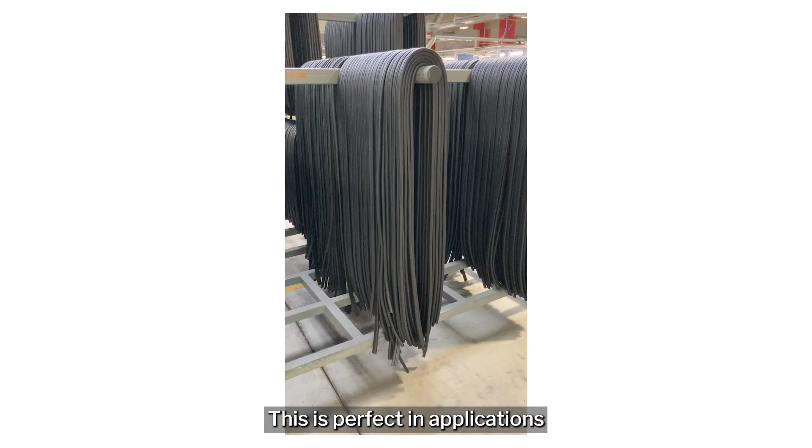The most common special delivery we do is supplying pre-cut lengths. This is perfect in applications where the user has neither the time nor resources to cut the profiles himself and has need of many of the same length.

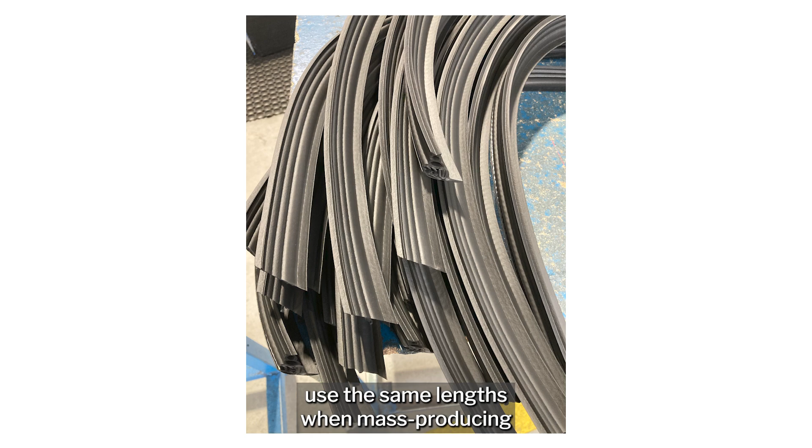We commonly deliver custom cut profiles with a straight 90-degree cut, but we can also supply you with lengths with mitered cut, usually 45 degrees. This is a time-saving process for customers who repeatedly use the same lengths when mass-producing vehicles, electronic enclosures, or similar.

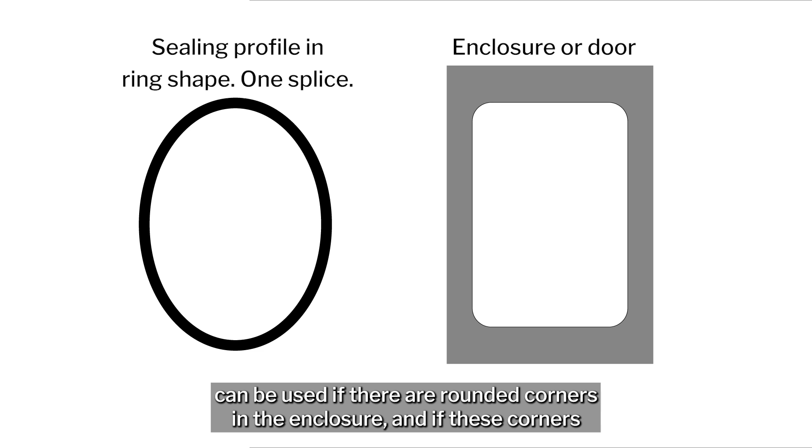Another real time saver for customers is when we supply the sealing profiles as rings or frames. Then mounting the profile in the same shape as the enclosure is fast, using a rubber mallet. A sealing profile in the shape of a ring can be used if there are rounded corners in the enclosure and if these corners have a radius bigger than the minimum bending radius stated in the product data.

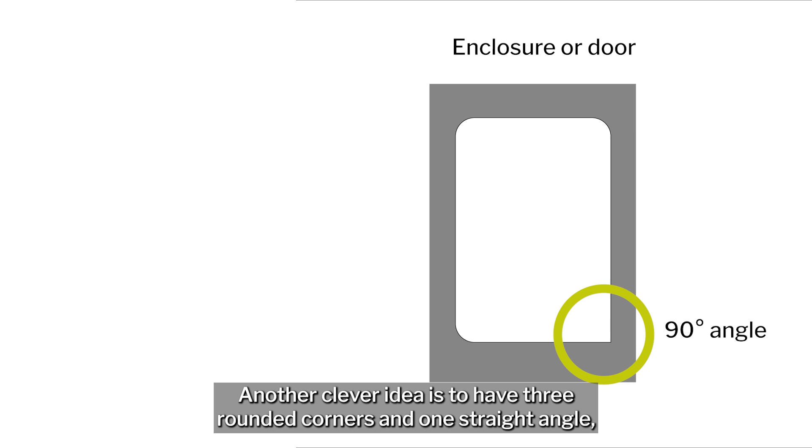Another clever idea is to have 3 rounded corners and 1 straight angle and have us deliver the splice in the ring with only 1 mitered corner. This splice goes into the 90-degree corner of the enclosure and the profile is nicely applied over the other 3 rounded corners.

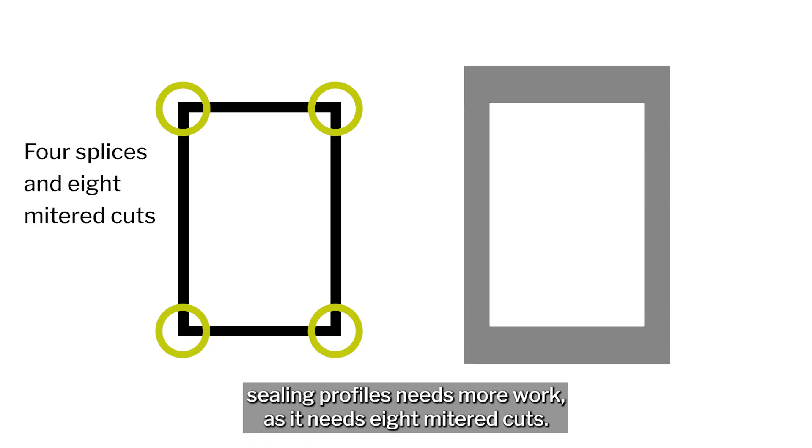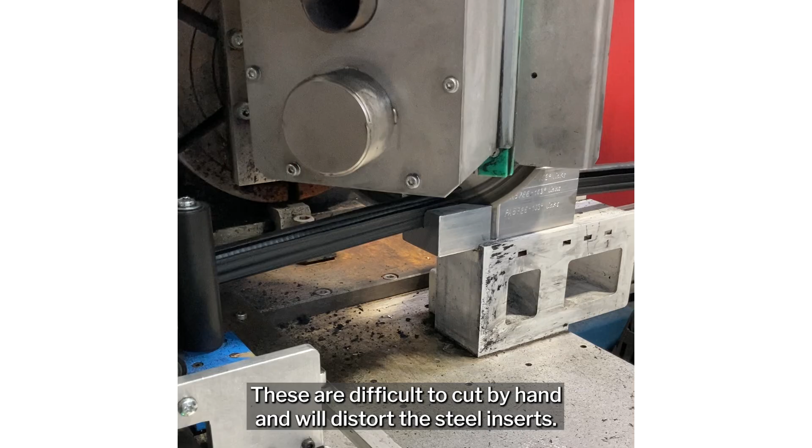A rectangular frame is used at times when the enclosure has several straight angled corners. Creating a frame from sealing profiles needs more work, as it needs 8 mitered cuts, but our special machines and cutting jigs make it easy to cut through the molded-in steel inserts. These are difficult to cut by hand and will distort the steel inserts.

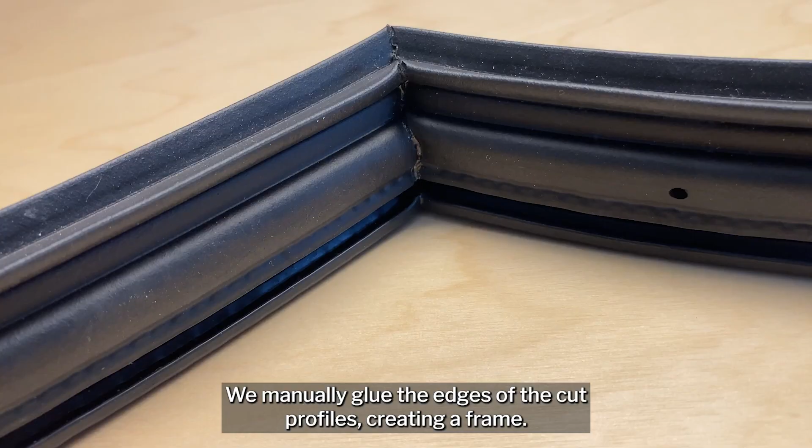The cut profiles are joined in the corners in 1 of 3 ways: glued corners, foil vulcanization, or injection molded corners. The glued corners is the quickest and easiest way. We manually glue the edges of the cut profiles, creating a frame. Gluing is suitable for smaller batches as it's labor intensive.

The advantage is that no tools are needed, so it's a quick process for when the first serial produced parts are needed. The disadvantage is the manual labor and that this solution cannot be used with high pressure or when there's a lot of movement of the profile.

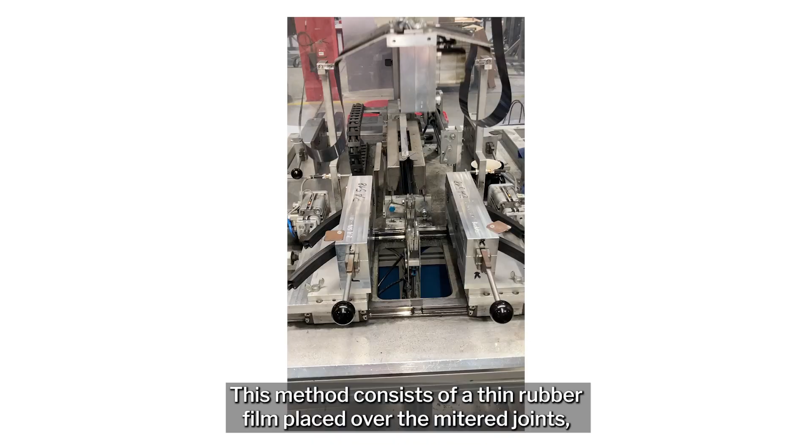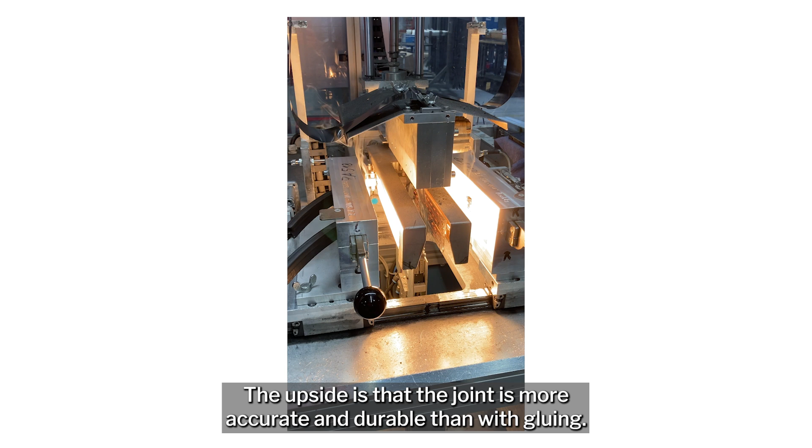Foil vulcanization. This method consists of a thin rubber film placed over the mitered joints, and the film is vulcanized onto the profile like a permanent band-aid. The upside is that the joint is more accurate and durable than with gluing, but the downside is that you will need a tool for vulcanizing the film onto the pieces of sealing profiles.

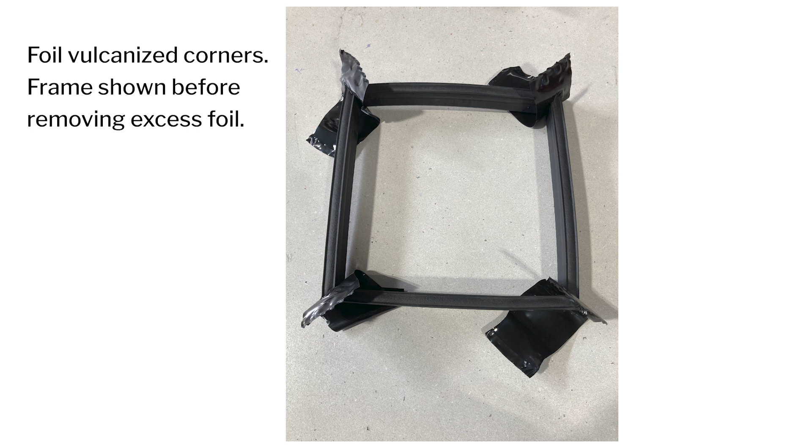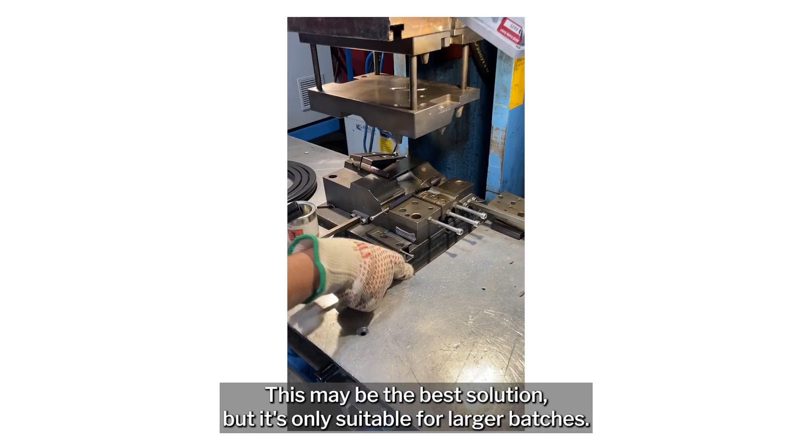Finally, injection molded corners. This may be the best solution, but it's only suitable for larger batches. Here the pre-cut profiles are inserted in a tool and the corners of the tool are injected with EPDM rubber that's vulcanized, fusing onto the profiles.

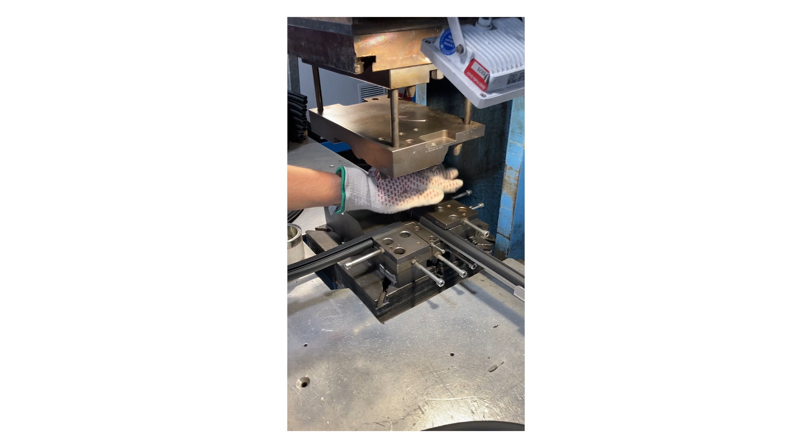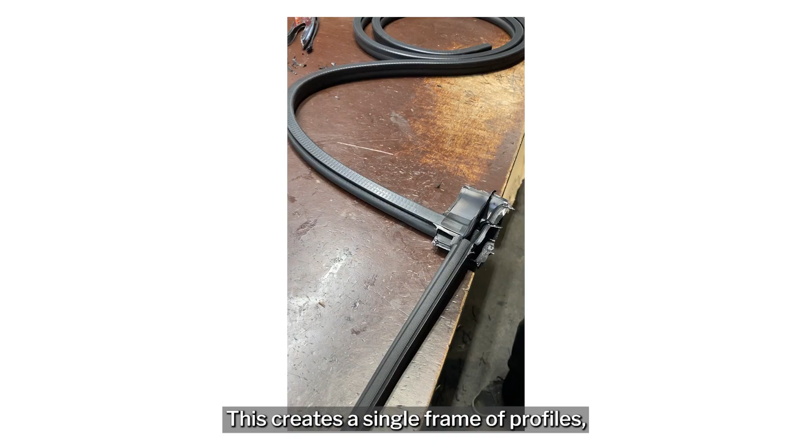This creates a single frame of profiles including straight angled corners or any angle and with excellent strength. The upside here is the supreme integral strength and perfect joint, but the downside is the pretty high cost of the mold. But the result is beautiful.

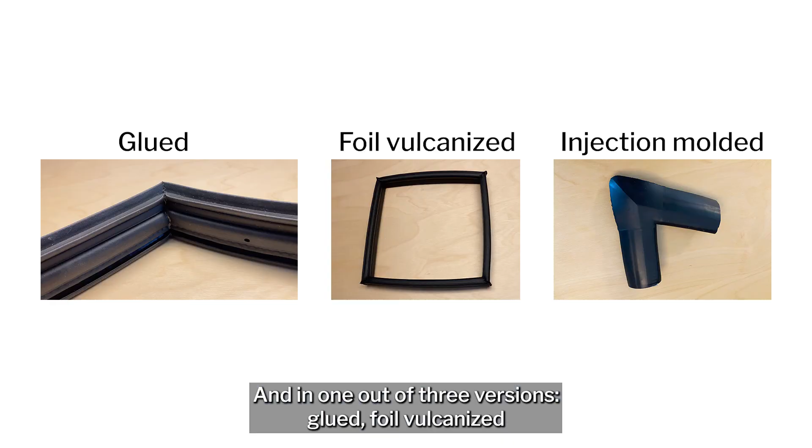So that's it. You now know that we can supply you with pre-cut lengths of profiles, either cut to straight angle or mitered. And you also know that we can supply the profiles in rings or frames and in 1 out of 3 versions: glued, foil vulcanized, or with injection molded corners.